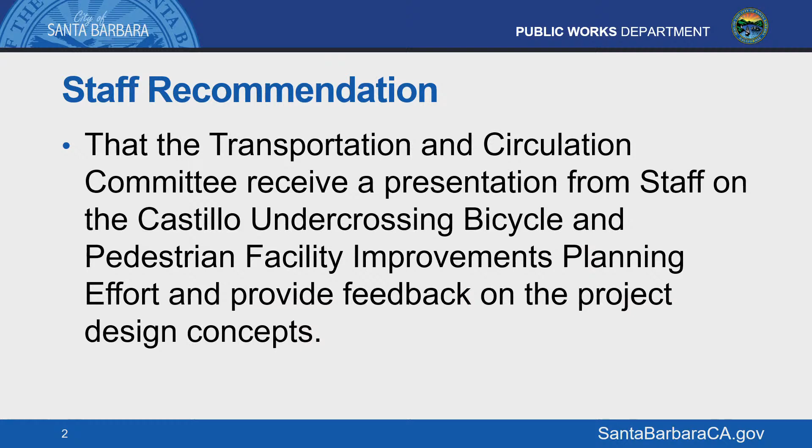So to go over the purpose and project overview, as we all know, Castillo Street Undercrossing is a very important connection in the city for walking and biking between the downtown area and the waterfront, and also an important connection to Santa Barbara City College. So really this effort is to look at ways to improve walking and biking in this important connection.

We've heard from the community, from the pedestrian master plan outreach process in 2006 and the bicycle master plan update in 2016, and we continue to hear that there's a strong need to improve safety in this location for walking and biking. So we received a Measure A grant for this planning effort, which covers preliminary survey, concept designs that we developed in-house, and this public outreach process.

To date, we have had 2 webinars and 1 in-person meeting with the community, which brings us to tonight to receive feedback from the TCC. The ultimate goal of this planning process is to develop a community-supported project so that we're ready to apply for grant funding in 2023 or 2024 for final design and construction.

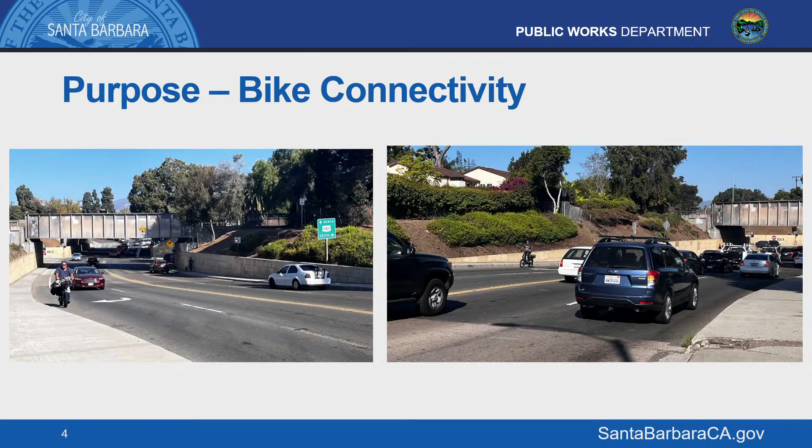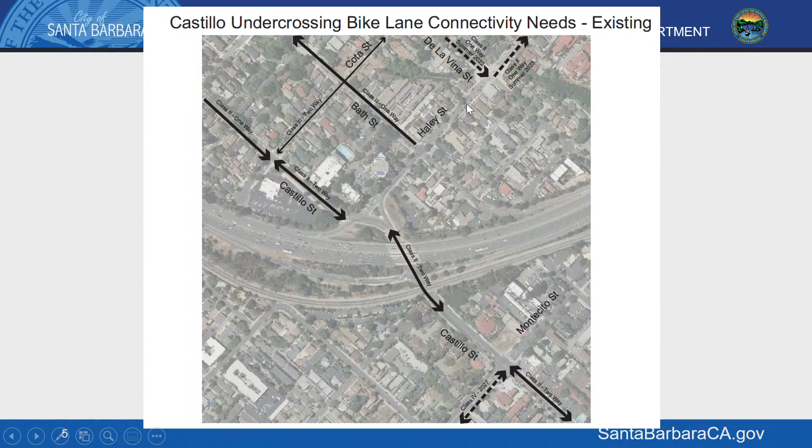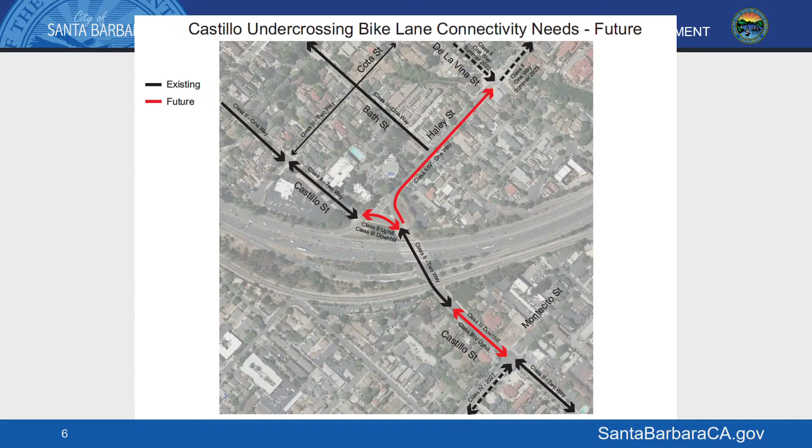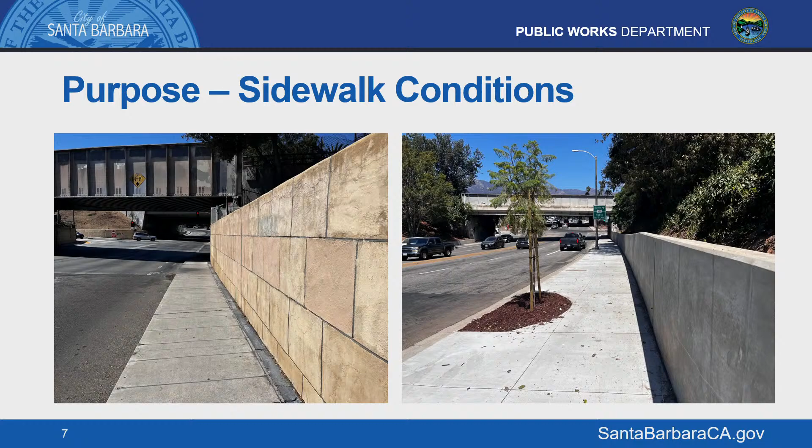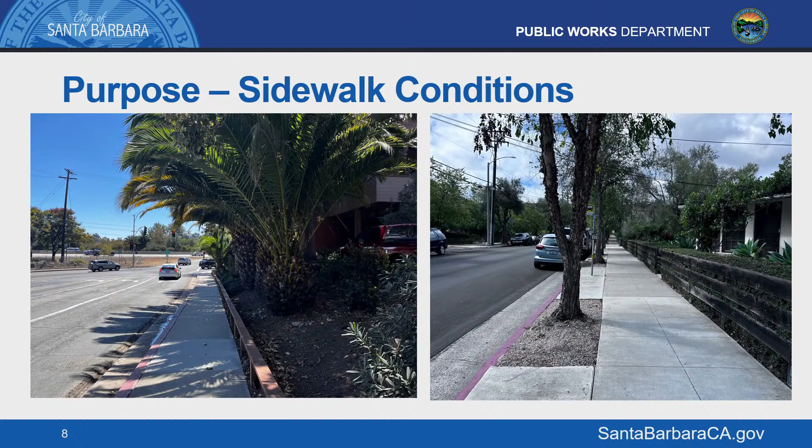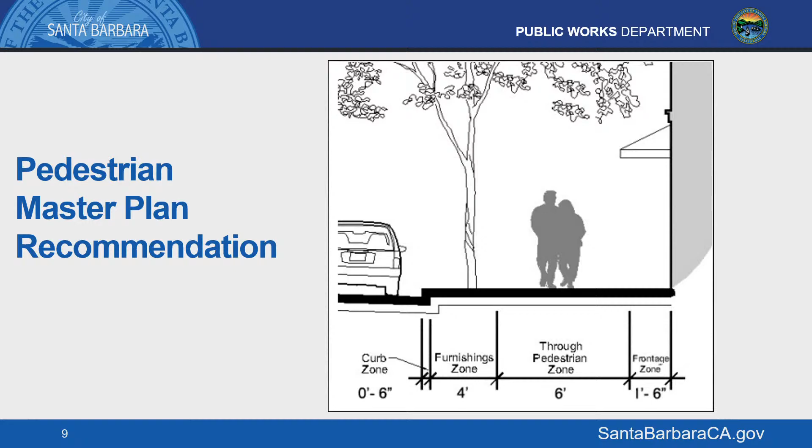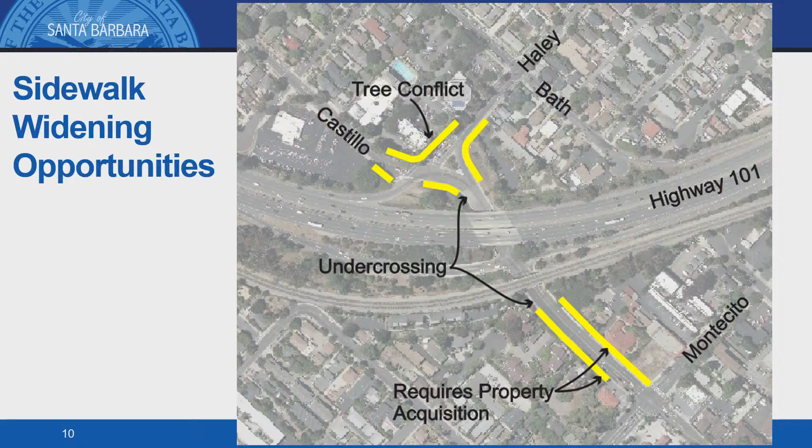I'm going to now hand the presentation over to Derek to get into some more details of the project. Thanks, Chelsea.

Getting into widening would be getting into bridge replacements, and that would trigger addressing a whole bunch of substandard things that are associated with this interchange. And order of magnitude, this is probably closer to a $100 million interchange replacement project. So that is quite a ways down the road. So the question is, what can we do in the meantime, smaller, more reasonably, in order to improve safety and improve the comfort for roadway users?

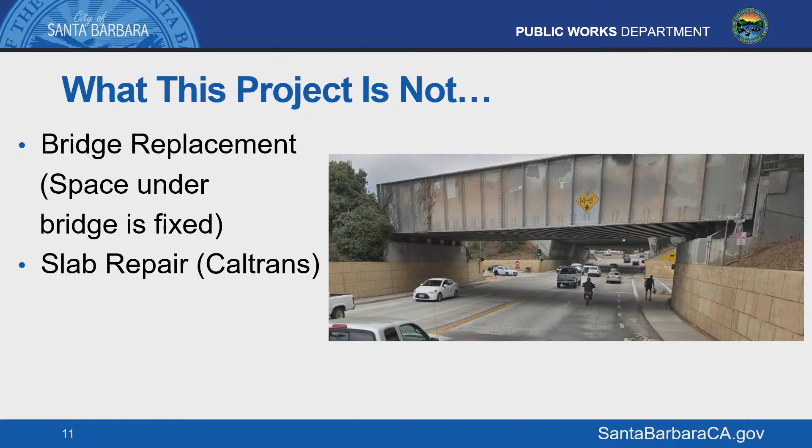Thank you. So we're going to just kind of walk you through some of the features and possibilities that we see for these corridors. Could I borrow the mouse just so I can point at things? Thank you.

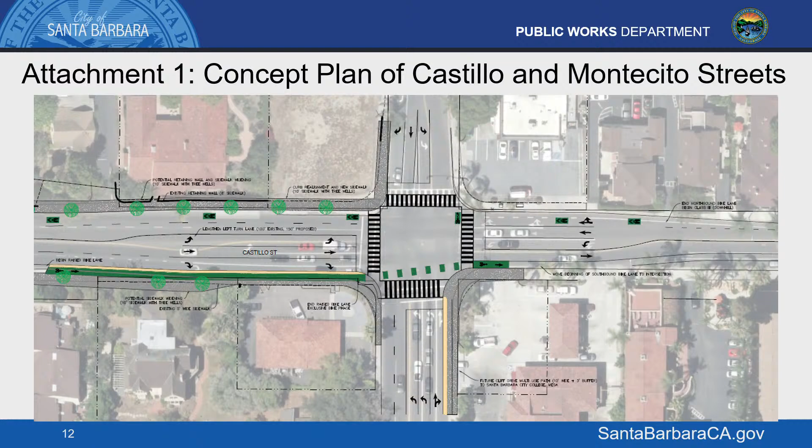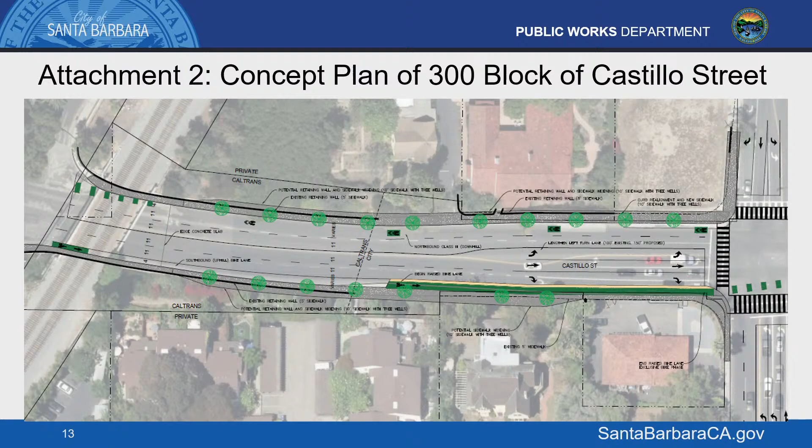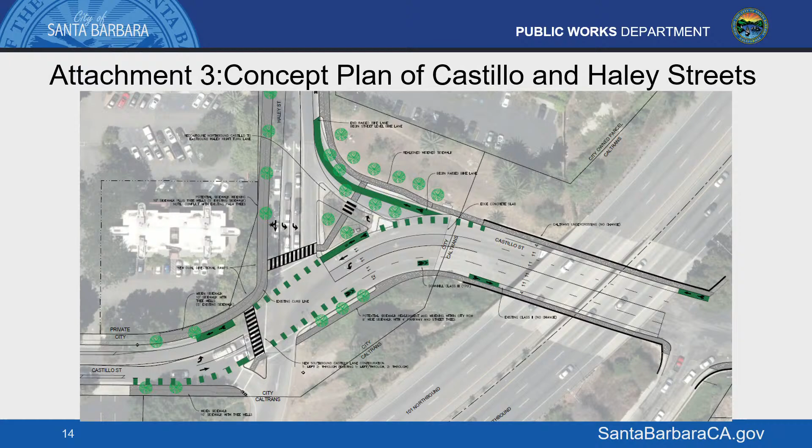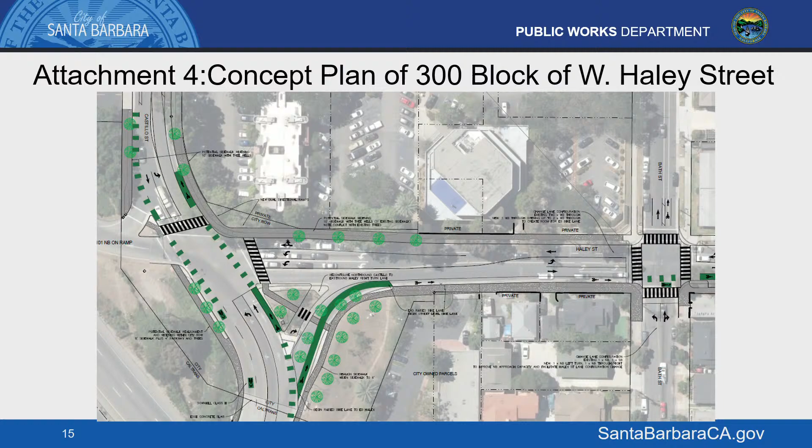And again, the sidewalk along here can be widened. There's a lot of, it's not a straight sidewalk. You have to change your walking path to get around utilities and stuff there. So that could be cleaned up and just made into a much nicer walking experience. So then if we go one more slide.

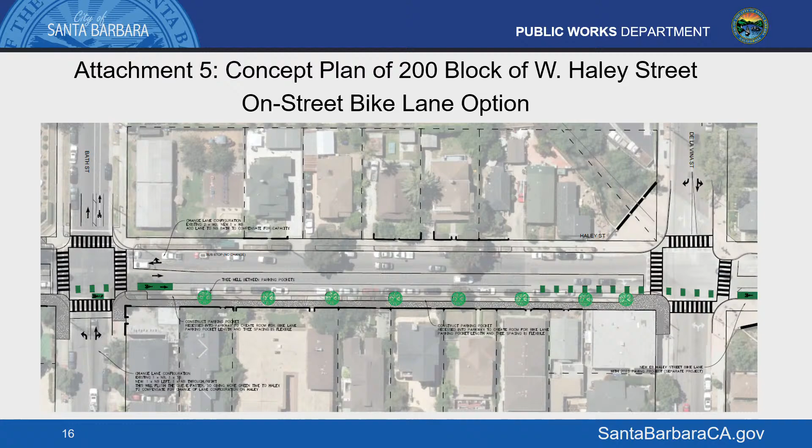Okay, so this is the block between Bath and De La Vina. There's 2 options for this block. The first option we're showing here is an in-street bike lane. And so where we would get the space to create an in-street bike lane is actually we would recess the parking into the parkway. So we would kind of make some carve-outs into the parkway. We would alternate parking with street trees, and that would create enough room on the street for a bike lane. And that would feel similar to the rest of Haley Street, where there's a bike lane between parking and the traffic lane. Next slide.

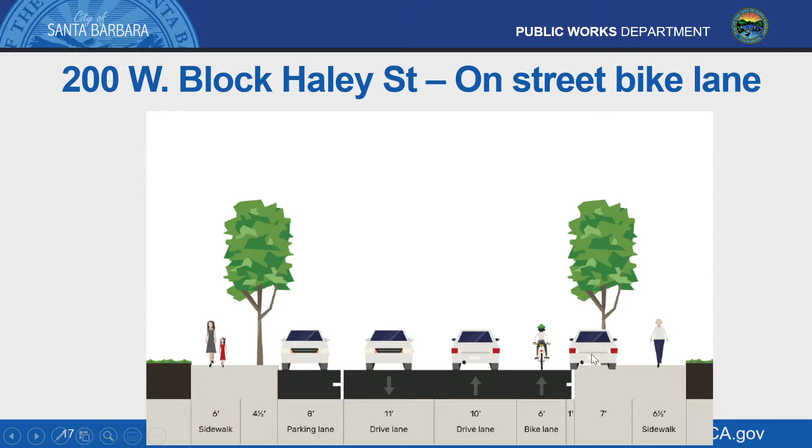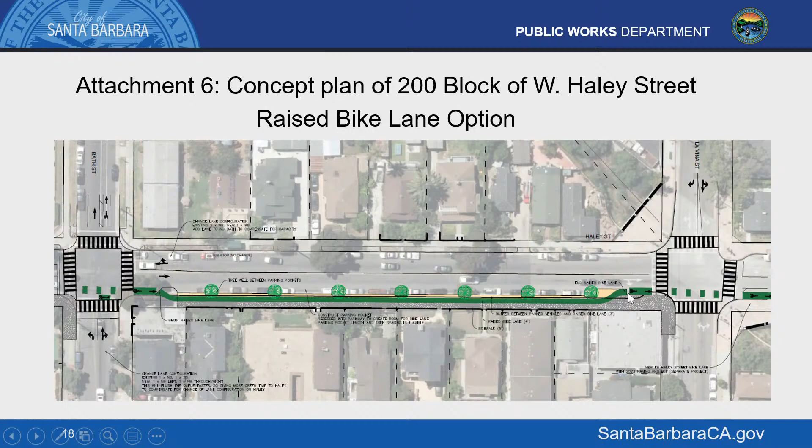The other option is to do a raised bike lane, and that raised bike lane would be between parking and the sidewalk. So again, we would have to create these, what are called parking pockets. So the parking is kind of recessed into the parkway area and would alternate with trees. But the bike lane would actually climb up from street level up to sidewalk level between parking and the sidewalk, and then it would drop back down into the street at the far end of the block.

And just cross-section wise, that's what it would look like. So again, the parking and trees would alternate, and there'd be a 3-foot buffer between the parking and the raised bike lane, just in case doors open. And we would have a 4.5-foot wide raised bike lane right next to a 5-foot sidewalk. Ideally, those would both be wider. 6 and 6 would be great, and it would be even better if there was some separation between the bike lane and the sidewalk. But just given the right-of-way constraints here, this is the optimal configuration.

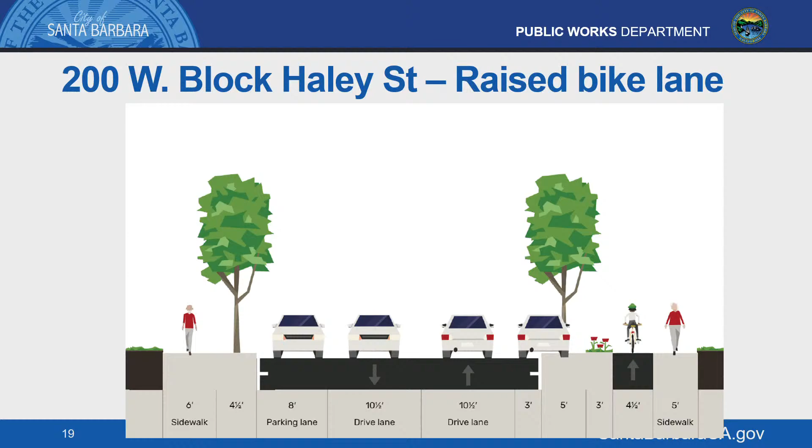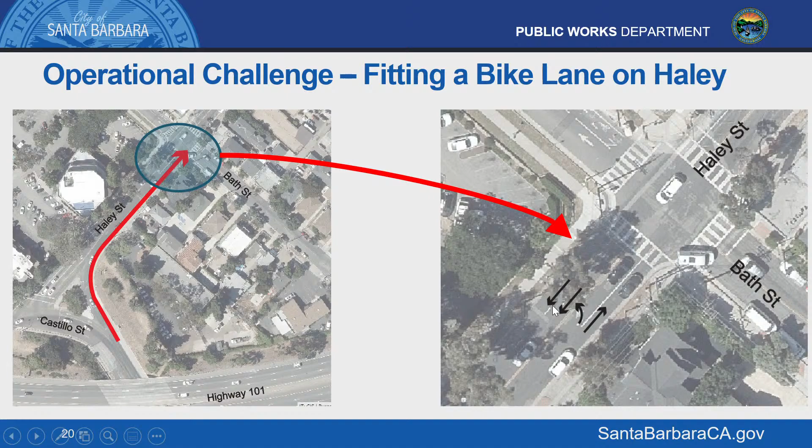Okay, so kind of going back to what I mentioned earlier about changing the lane configuration on Haley Street in order to fit in a bike lane at Bath. So this is that area just immediately west of the Bath and Haley intersection. And right now, as I mentioned, there's 2 lanes that go towards the freeway. And if you go to the next slide.

There's a couple ways that we can possibly deal with that. One of them is the restriping that we mentioned. The other option that we analyzed was possibly putting the bike lane where the parkway is right now, but we found utility conflicts, trees, traffic signals. It's not particularly wide, so it would likely be expensive and probably not particularly comfortable. So we focused our efforts looking at the restriping.

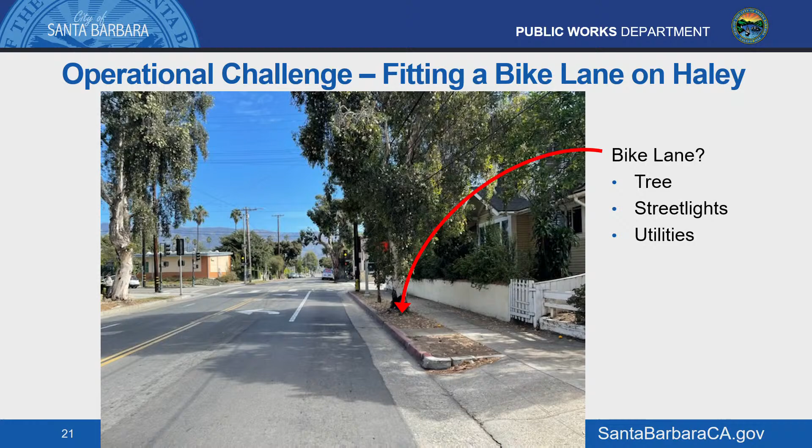So on the left, that red arrow shows the lane that would be removed, and that's just immediately west of the intersection. As you go towards the freeway, it would open back up to 2 lanes, and then the existing lane configuration as you get closer to the freeway even opens up again to 3 lanes. Next slide.

So removing a lane west of Bath kind of has a cascading effect. If we remove a lane west of Bath Street, east of Bath Street, there's 2 lanes feeding into that. So you can't have 2 lanes feeding into 1 lane, so we would have to eliminate this lane as well. You can only have 1 lane feeding into 1 lane. And by doing that, we lose some capacity at the intersection.

And this is an important intersection because it serves the Bath Street off-ramp, and it's also an important way to get to the Castillo Street on-ramp. So capacity is something we would need to address. The way to do that is to turn Bath Street into a 1-way street south of Haley. So right now, south of Haley, Bath is a 2-way street. It doesn't turn into a 1-way street until north of Haley. That's where the bike lane begins. But south of Haley, it's a 2-way street right now.

So by adding a lane going northbound, making that a dedicated left turn lane, that adds the capacity to the intersection that would offset that other lane that we would remove. And this actually has a secondary benefit because that existing single lane that comes from the Bath Street off-ramp up to Haley Street, that backs up to the freeway regularly. You know, it's especially driven by City College schedules, but at times that can back up towards the freeway.

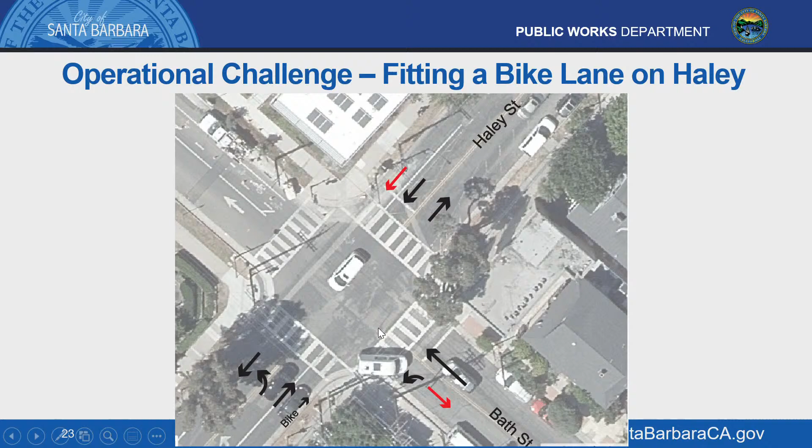So we know that from a traffic perspective, it's actually a good thing for the intersection. It's not just a good thing for the bike lane, but it'll also relieve some of that off-ramp queuing that's happening. But the question is, if you live south on Bath Street, how do you get home? How do you get to your business? The way to do that would be via De La Vina Street. So if you're eastbound on Haley, it would be going to De La Vina, turning down De La Vina. There's either the back alley or Cottage Grove, which would take one over to Bath Street.

We did some traffic counts, and we found that typically during peak hours, traffic going from the off-ramp up Bath Street was in the 400 to 500 an hour range. Going from Haley Street down was typically in the 10 to 20 range. So pretty lopsided as far as what the demand is. And about half of those 10 to 20 were heading for somewhere around Cottage Grove, so they could reasonably use De La Vina. So we're probably looking at about 10 during the peak hour, which we would be creating a more circuitous route for.

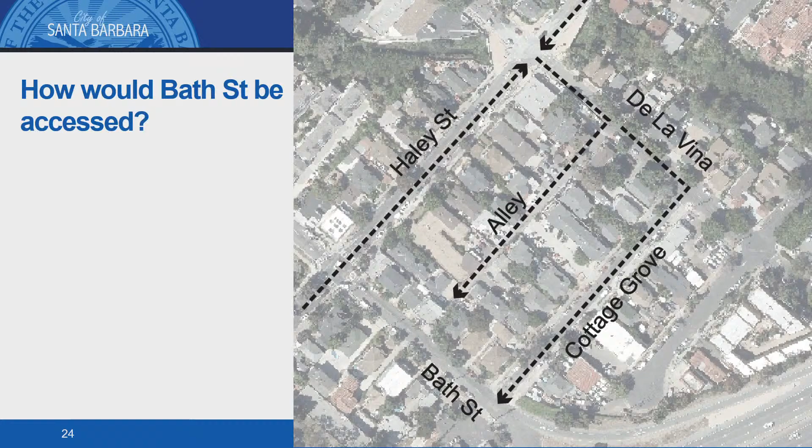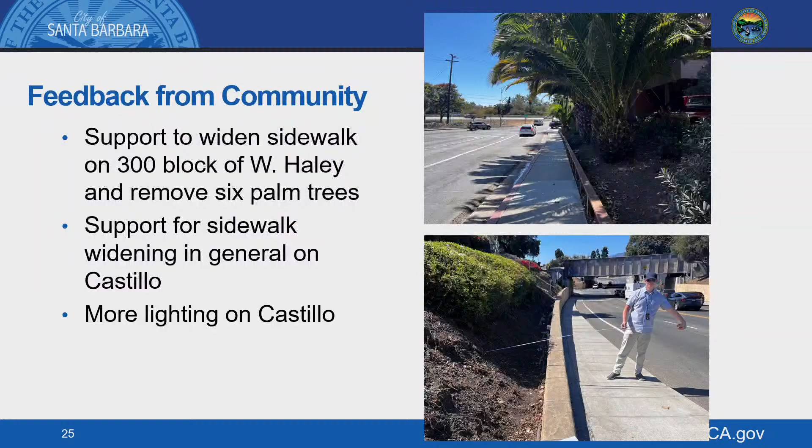Once we get beyond this corner, there's a jog in the right-of-way line. So once you get to the driveway of the Genealogical Society, there is opportunity again to widen the sidewalk corridor within the right-of-way, and that would not require any property acquisition. One thing I wanted to point out as well, there was a desire to lengthen the left turn lane on Castillo that turns onto Montecito Street, so that it would help with people turning into the driveway at the Genealogical Society. And so that's something we're studying, and there is potential that if we were to do that, it might require that widening of the sidewalk area.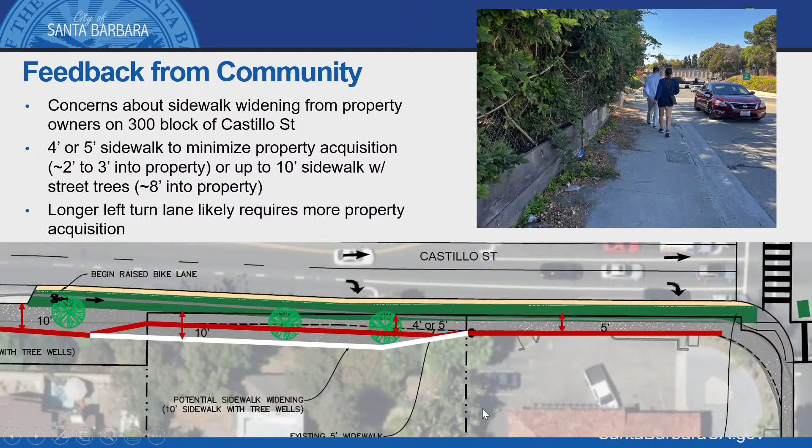And then, as mentioned, people did bring up a lot of concerns about the existing undercrossing and the Caltrans right-of-way, and how it's frequently wet in the bike lane. And one idea that came up from a community member was to raise the bike lane to the level of the sidewalk. I'll let Derek talk about the sections here that he created.

Thanks, Chelsea. So again, we have 62 feet with which to work under the freeway bridge. It is Caltrans right-of-way, so we are beholden to Caltrans design standards and lane widths. Caltrans standard lane width is 12 feet, and anything below 12 feet is a design exception and challenging to get. They currently have 11-foot lanes under there, and that's just because there just isn't enough room under there. They really have no choice.

But one option is to essentially expand the sidewalk area from an existing 5-foot wide sidewalk to 8. And that 8 feet would be a shared bike pedestrian space. And that would leave a 12-foot curb lane and 11-foot interior lanes. Caltrans likes 12 feet against the curb, and when people drive, they tend to shy away from the curb, so it is a reasonable thing for them to be asking for.

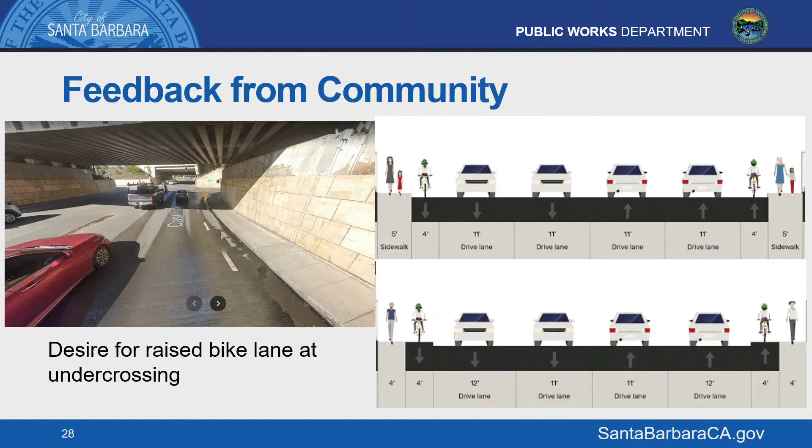And again, the two options on Haley Street between Bath and De La Vina, as far as what the community prefers: the in-street bike lane, which would be consistent with the rest of the corridor, or the raised bike lanes that are a little bit narrower than we would prefer, but provide that protection from the street traffic. The bottom configuration with the raised bike lane is likely much more expensive.

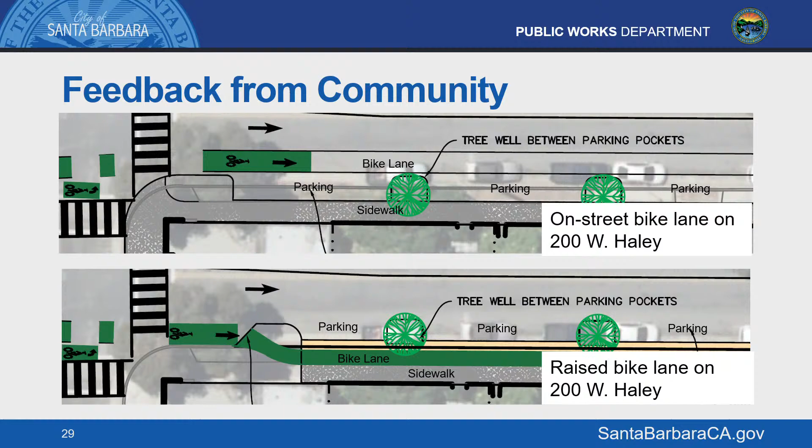And we were wrestling, is it worth the extra expense for this one particular block, given the entire corridor has in-street bike lanes? We heard mixed feedback from the public. Some people thought the extra protection is a really good idea, even if just for a block, and others didn't think it was worth the money. And again, those are just comparing the two cross sections with the in-street bike lane on top and the protected bike lane on the bottom.

Thanks, Derek. And I did want to add, which maybe you said, but I'll add, we did hear support from the public for minimal parking removal to accommodate either option of those on the bike lane.

So here's our desired feedback from the TCC. Again, just summarizing some of the bigger themes and feedback we received from the public. We'd like to hear from you about the sidewalk widening options where it would require property acquisition on both sides of the street. Also the raised bike or shared bike and pedestrian path, the idea of doing that in the Caltrans right-of-way under both bridges.

And then also support or non-support for widening the sidewalk on the 300 block of West Haley where the palm trees are, which would require their removal. And then the two Haley Street bike lane options, on street versus raised and separated. And then lastly, the changes on the 400 block of Bath Street from a two-way street to a one-way.

And I did want to point out, I think I didn't earlier, we did have a webinar specifically for the Bath Street neighborhood where we noticed the residents in the area. We wanted to hear their feedback first on the changes that would take place on Bath Street. And we haven't heard feedback from residents or business owners in that area one way or the other. So just wanted to note that as well.

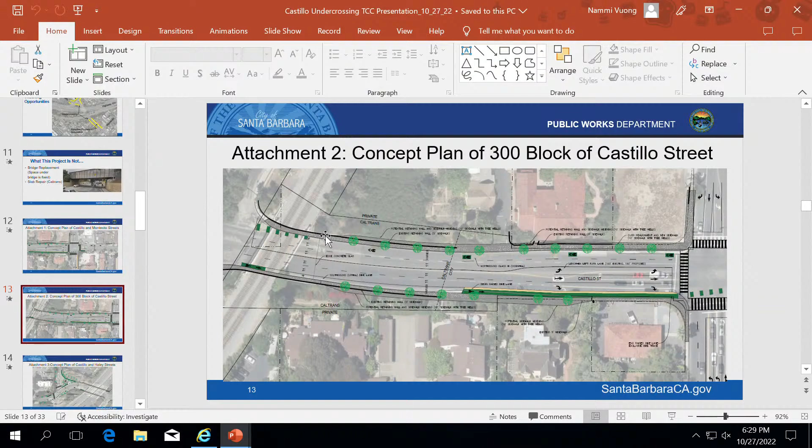The lane configuration wouldn't change in that area right now. There is a short bike lane in that area, so as you're coming from Montecito Street down the hill towards the interchange on-ramps, the road does flare open a little bit, and the way Caltrans has it striped right now, there is a short bike lane, so that wouldn't change just because we're locked into those widths. So the radius onto the on-ramp likely wouldn't change.

Sure. Committee Member Blackerby? Thank you for this. One question about, well, frankly, anywhere we do these projects, but on Haley, you're right about you kind of have to jog in and out of utility stuff. I'm just curious, from kind of a public works and city perspective, is there ever a time when you do a project, and I know it costs more money, but where utilities can be undergrounded? And I know there's all kinds of flavors of utilities through there, but there are power lines. Is that ever part of something, or?

My understanding is that if there's no room for the utilities after, then that can trigger undergrounding. Alternately, if it's the city's desire to underground, the city can take on that expense. The thing about these projects is because the city has such a large maintenance backlog, it tends to dedicate its own funding towards the maintenance backlog. We rely on grant funding for a lot of these types of projects, and incorporating utility undergrounding into what we're asking for makes our funding applications less competitive.

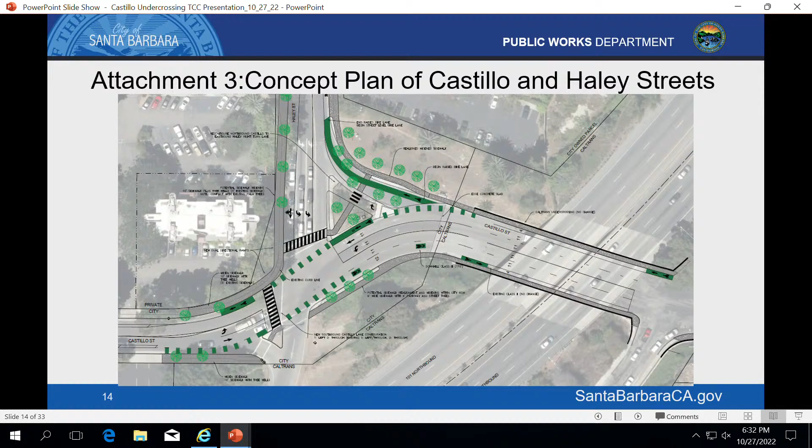If I can borrow the mouse. So that's this area down here. This is the DMV property, and then going south on Castillo Street, this is that little hook right turn lane to get onto the on-ramp. Changing the configuration of the on-ramp is not in the scope of this project. It's just as the bike lane and the traffic lanes pass by that on-ramp, that's what would change. Well, the concern always is, are the bicyclists going to have an opportunity to get out of the way if a car's zipping onto the freeway?

Yes, and with the class 2 lane, that's how the right turns work. They're supposed to become a shared space as they approach the right turn lane, which ideally, as we're proposing to do as you get closer to the Montecito Street intersection, there can be that dedicated space and possibly even a dedicated traffic signal phase. But it does take up more space, and it is an expensive feature as well.

Are we on questions or comments or both? No comments? We can't do comments? Not yet, okay. I have a few questions. Can I go next? Okay, thanks. Can we go to slide 12? I think. Page 12?

Yeah, I think you kind of touched on this, but the right turn where the green lane going southbound towards the intersection approaches JJ's Liquor there, that driveway is still going to be preserved, right? So people would be turning there. Is there a reason you want to keep the bike lane hugged to that corner instead of putting it in between the through lane and the right turning lane? That's a really good question. Thanks for asking that. So that's what we call a weaving maneuver.

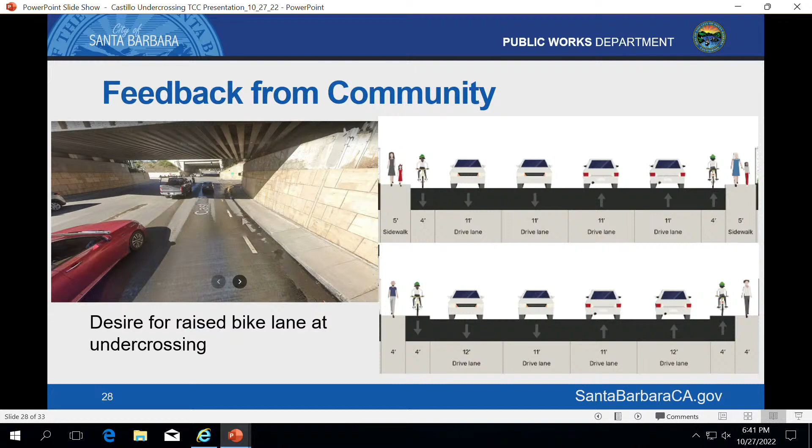I have another question while we're on the slide. Specifically, the picture on the left side, the spot where it's shaded and cars are turning right to go southbound on Highway 101. I know that's Caltrans design, correct? I know that's sloped for an ADA ramp purpose, but where the person queues and waits to enter the crosswalk feels super vulnerable. I walk this all the time. I live 2 blocks from here.

And so when you're standing there, you're at ground level with the cars that are turning to get onto the highway. Is there a reason? I was gonna make this a comment, but is that a design decision for Caltrans? Because it feels like someone turning could almost drive up, and you could see the scuff marks of cars driving up into that section.

Yeah, I can't comment on how Caltrans designed those particular ramps. A contributing factor to pedestrian discomfort there is also the large turning radius, and Caltrans designs their corners so that large trucks can turn onto their facilities relatively easily. If we do get feedback that the desired path forward is the bottom facility, the 8 feet, the next step then is going to be to approach Caltrans and start talking about altering the sidewalk on that

leaky slab. But we would like to study the corner radii turning on and off of the southbound ramps at the same time, just to make sure they're not over-designed. We understand that Caltrans is going to be rigid with the ability for trucks to make their turns, but is it optimally designed? Is there some space to squeeze that down and create a more comfortable corner for pedestrians?

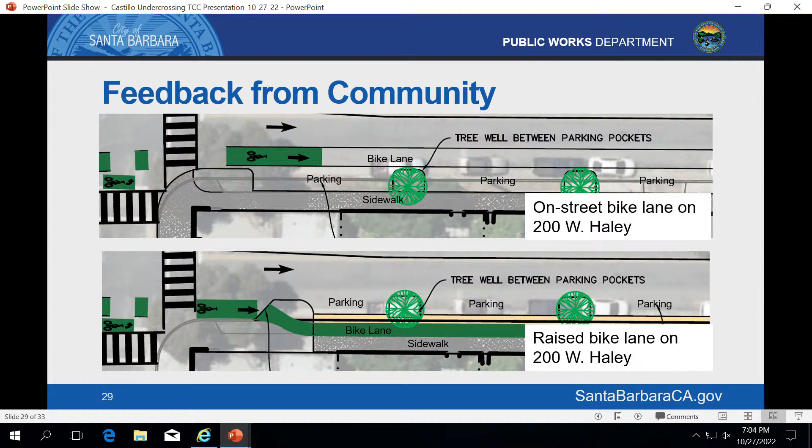I think we can maintain it. Okay. We looked at that tree fairly recently with our city arborist, and if you notice on the sidewalk side of that tree, there is some significant deterioration. So he said the tree is in decline. How long that decline will take naturally, we don't know. We didn't ask that question, but just as I think we could build around it if there was a community desire to preserve the tree.

Okay. I'd say I hope it declines in a safe way rapidly because it makes it rough. I think it's dangerous to walk through there, frankly, because of how the sidewalk is lifted. And frankly, biking through there is a little dicey, and driving through there is a little dicey because the roots are, it's just a really massive tree, and the base of it is kind of in the way. So I'd say raised is better.

If there were trade-offs, I don't think the top one's the end of the world, but I think it would be nice to have these tree wells. I know that's something we talked about on Milpas, but I think it didn't maybe end up getting put in that plan. But it's nice to have around town. This would be adding trees, but there are a lot of places in the city where there's really big trees and maybe they're not in the right place, but we're not going to take them out unless they take themselves out. And so working around them instead of having a tiny sidewalk makes a lot of sense.

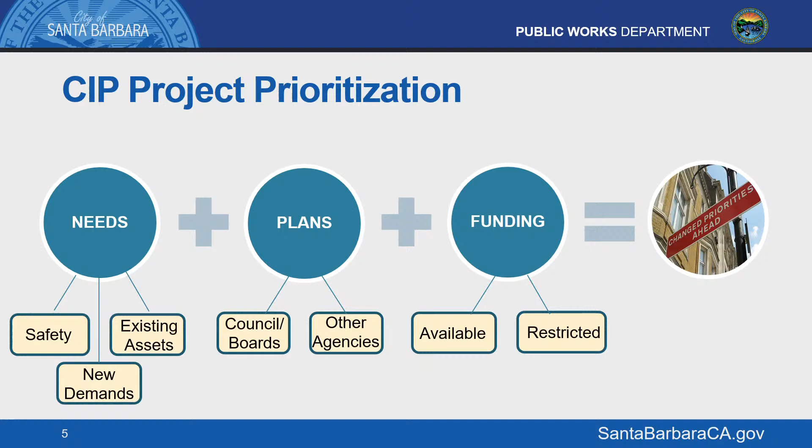This is just in general, again, citywide, when we're looking at project prioritization. What are the needs? Where are those needs coming from? Is it documented in a plan? Is it a council action? And then what does the funding look like? And amongst the different programs, there's always a lot of restrictions on where the various funds can go. And I'll go into what feeds our streets transportation program.

So before I go into the funding sources, how do we get to all of these projects that are referenced in your Exhibit A and B for the list of names? And really there's a lot of sources on where they could come from. It's our general plan, and under the umbrella of the general plan is our circulation element. The bicycle and pedestrian master plans have very long lists of capital needs documented in those.

Our Vision Zero strategy also documents the key corridors where we have collision patterns and where we would need to have capital improvements on the corridors that do have engineering solutions. Neighborhood requests and the neighborhood transportation plans, just as you've seen over the years with the east side and most recently the west side and lower west neighborhoods. And also with our bridges, we have a lot of funding for bridge projects, and a lot of those are documented from the Caltrans bridge inspections.

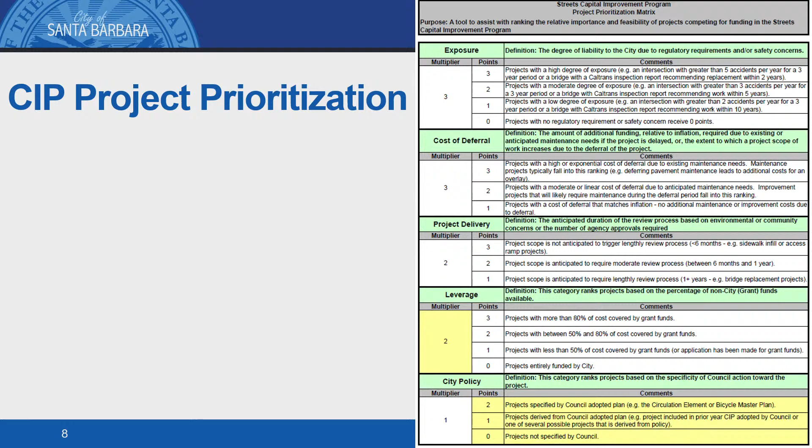So where does the money come from in our streets transportation capital projects? There's the overall streets transportation capital program, and there's three main sources for that. It's utility users tax and gas tax, and the utility users tax comes from a formula from our finance department, and about half of the utility users tax funds that we receive go into roadway repair. Measure A is the half-cent sales tax. Again, this one is formula based, and we will be receiving the upcoming projections for Measure A starting next month. And then there's SB1 funding, which is also formula based.

So in general, for our streets capital program, over the cycles that I've worked on, from all those sources it's approximately 2.5 to about 4.5 million, plus or minus, which is great, but not a lot of funding. And so we had this amazing Measure C come into play. I think 2018 was when it initially started, and that is also tax based, and that was the big game changer for maintaining our roads, because, if you remember from committee cycles ago, pretty much 95% of every streets capital budget always went to pavement maintenance. But even with that, it was severely underfunded for many, many years.

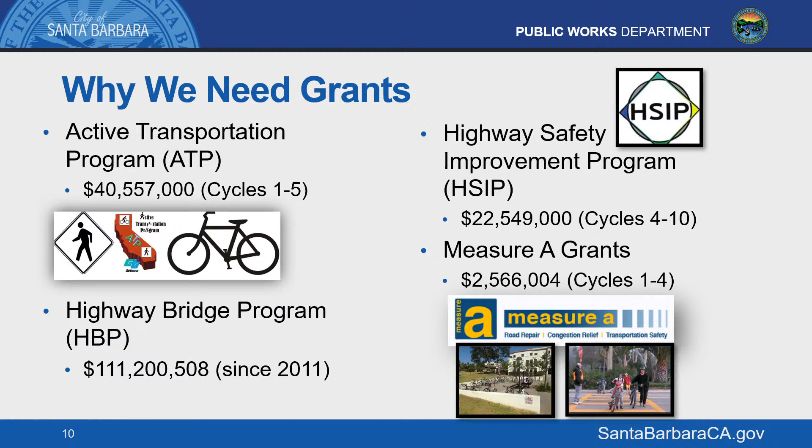So on your Exhibit A and Exhibit B is the list that's making it into the next 5-year capital improvements. I will not go over every single one of the 67 projects. I will say that this is the first year that we've been under 80 projects, so yay, that's a good thing, because there's sometimes years where is anything going to fall off the list because we're waiting for funding.

And so we've been really happy to see a decrease in the number of projects, because there's so many projects just recently constructed or headed to construction this fiscal year. So we've had a decrease in that. And then we were able to merge some projects that seemed to make sense as well.

So generally speaking, when you go through the document, you'll see in the various project titles, because we have so many projects in our program, it's the most of any department as far as the number of projects. So in order for us to keep track of them, we had to come up with what are the best grouping themes to them.

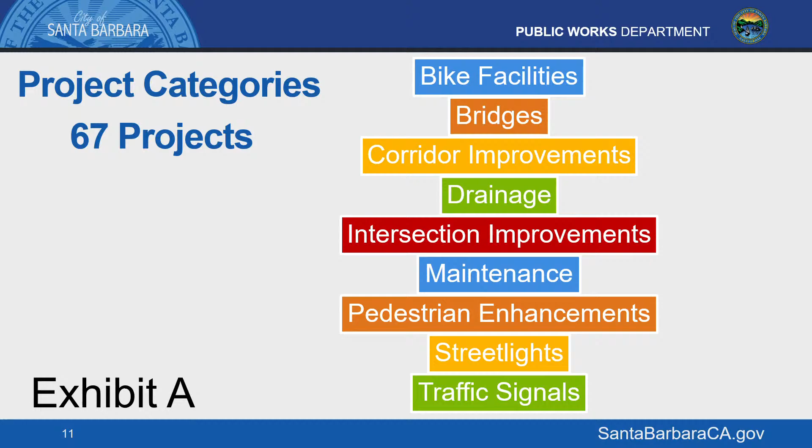And I think, oh gosh, okay, so on your Exhibit B is the template that we have, and this is a template followed by all departments as far as the format. And so for those that are not familiar with our Streets Capital program, this is how all of our project descriptions are laid out, and they're all meant to be one page. Because you can imagine how thick this is, and then when you get the rest of the city projects, there's a lot of projects that the city council ultimately has to review.

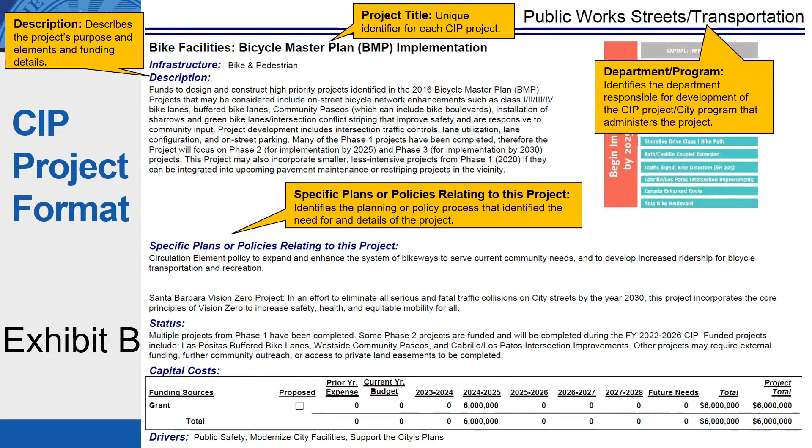So again, on the top right corner, we'll have the department or program it's coming from, what your project title is, the description of the project's purpose, the various plans or policies of where the project is coming from, the funding sources, and unfortunately, the way they have it set up, because it's a one-size-fits-all template, and not the best for us, usually we cannot describe each of the grant and source names, so in the description, we try to put it in there. But what you'll see a lot of times is grant, and then one line, and you might see another grant line, because a lot of our projects also are multi-funded.

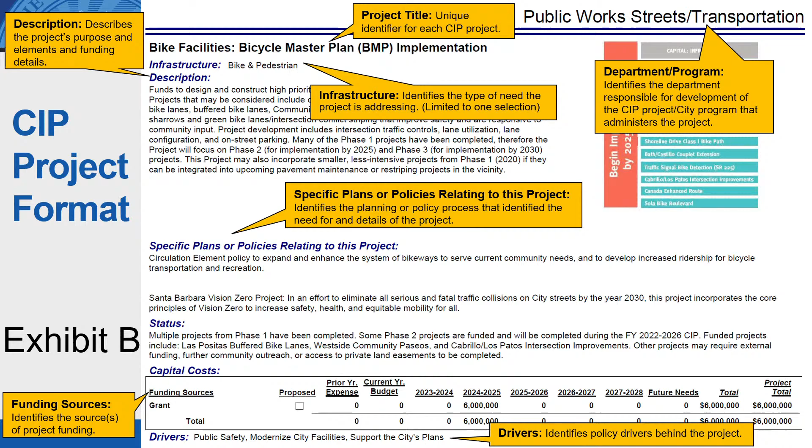And then what are the specific drivers at the very bottom of the project page, and the type of infrastructure that it is. And I think those were all the main items that make up the project description summary.

Although I'm not going through all 67 projects, we always like to point out what's new, because for those of you that have been on this committee and reviewed the program 2 years ago, you will see a lot of repeat information. But the changes would be a lot of the status updates. And of course, since 2 years ago, everything got more expensive. So you'll see a lot of updated costs in there as well.

But as far as the new projects in our capital program this year, there's the Santa Barbara Junior High Multi-Use Path, and that's one of the projects that we went over that received Measure A funding in this last cycle, so that is reflected in the program. Corridor improvements, we have the Las Positas Active Transportation Improvement Study. That is an area basically from the freeway along Las Positas going to State Street.

We've actually had some segments of projects along the corridor, and then we thought it would be best to merge them all together and really look at that corridor holistically.

We did apply for funding under the Highway Safety Improvement Program, I think we will find out in December, for the intersection at Las Positas and Stanley, and to do maybe a crossing improvement there. So yes, as Mr. Bailey just mentioned, December we'll find out, but that would be, again, sort of the kickoff and component to the overall study.

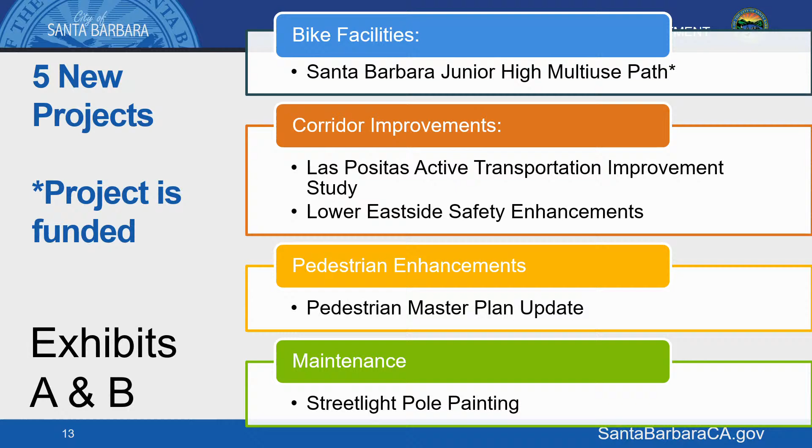And then the last item is a maintenance item, and it's the streetlight pole painting. Of course, in our coastal environment, the paint is not holding up as well, and it is time. Some of them are looking more unsightly, so to have a nice beautification and cleanup effort for those. So not too many to add to the program this year, just because we have so many great existing projects that we want to deliver, but these added ones are, I think, a good asset to our program.

And so really at this stage, we just hope to be in the ballpark of the 2.5 to 4.5 million. We're a little bit over on the FY24 side, but a little bit under, I think, on the FY25 side. But again, once we get the updated projections, and as we kick off the budget next month, we hope to have that. So generally, City Council will review and approve the capital program in March, and then closely followed a couple months later is the budget.

And so that's in your Exhibit C, and a lot of those projects too, especially the bridge projects and even the drainage project, also come into play with matching funding. So those are good, we're leveraging good monies there.

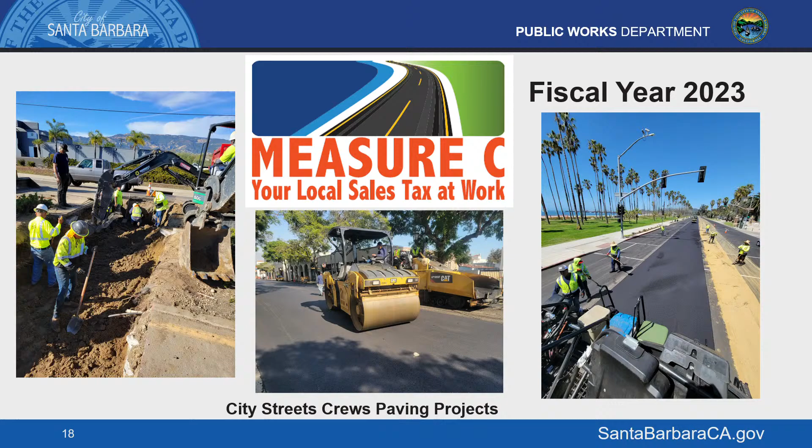Then the Modoc multi-use path extension has some matching funding out of Measure C as well. You won't see that project; it had been in our capital program, but we are expecting full final design and construction this year for that one. And there was some other matching funding on one of the other highway safety improvements for the intersections. So again, this has been a tremendous source, but the biggest component and the importance is really helping maintain what we have.

I'm not going to go through all of that, but essentially, again, we're running right around 16 million going into our streets program for Measure C. But Measure C also funds a lot of other key city projects as well. So you think of a lot of our parks and recreation facilities that get Measure C funding as well.

So next steps after tonight, when we receive feedback from you, we will finalize everything in the next 2 months. As I mentioned, we are hearing back from our grant applications, and we'll be finalizing everything. The entire capital program goes to the Planning Commission for review in January, and then a couple months later to City Council. And then, as I mentioned before, the budget goes for review May, June of 2023. So that concludes the presentation, and I'm excited to receive your feedback.

I know it's always a lot to go through, but with me tonight is Derek Bailey, our traffic engineer, to answer any questions, especially on the pavement maintenance part. We also have Eric Goodall in the audience. Eric, if you raise your hand, perfect. He is our principal civil engineer, thank you, I just blanked. He oversees our streets design team and streets construction team, so he's very up to date on all of our bridge projects and drainage and all of the above, and has been the lead on the State Street underpass project that we're hoping to go for construction award this December.